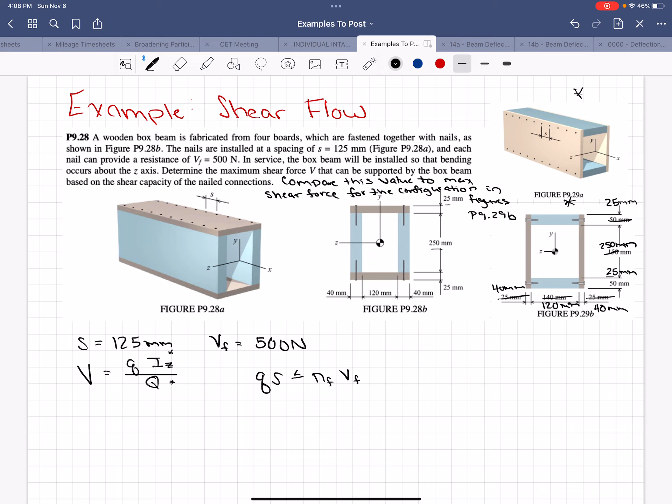So I will be the same for both, and how I'm going to do this is I'm going to find I of this whole outside box, and then I'm going to subtract I of this inside box. Okay, so that's our plan. So we have I equals the base of the outside box, 200 millimeters, times the height of the outside box, 300 millimeters, cubed, all over 12.

Now I'm going to subtract the inside box. The base of that is 120 millimeters. The height of that is 250 millimeters. That's cubed all over 12. And we get I equals 293,750,000 millimeters to the fourth. Because this is a rectangle, our neutral axis is in the middle at a height of 150 millimeters from the bottom.

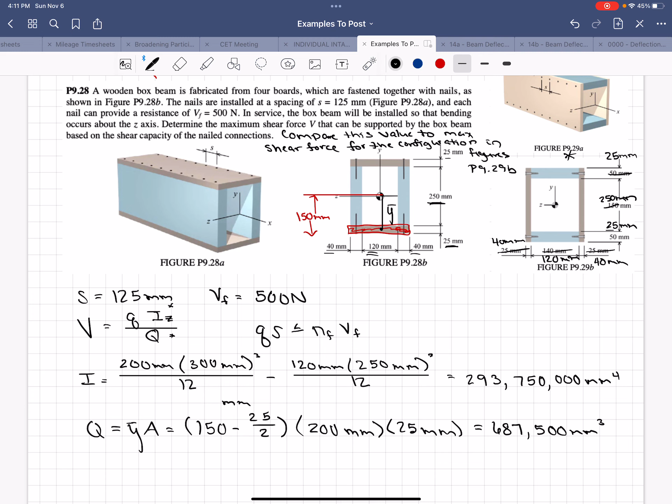Times the base of this is a full 200. We have the 40, the 120, and the 40 again. So times 200 millimeters, and the height is 25 millimeters. And we get Q equals 687,500 millimeters cubed. All right, now we are going to calculate the shear flow.

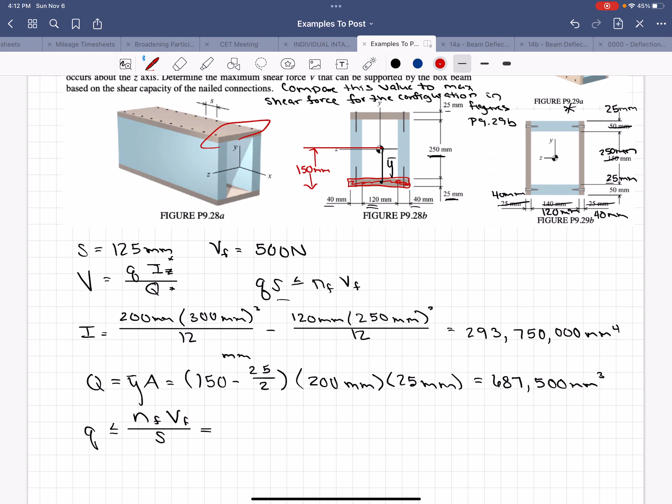So q from this equation is less than or equal to the number of fasteners times the shear force that the fastener can carry all over the spacing of the fasteners. So in this situation, the number of fasteners is 2. We're going to look at just one section of fasteners. We have one fastener here and one fastener here. So 2 nails times 500 newtons per nail, the capacity of those nails, all over a spacing of 125 millimeters. So q equals 8 newtons per millimeter.

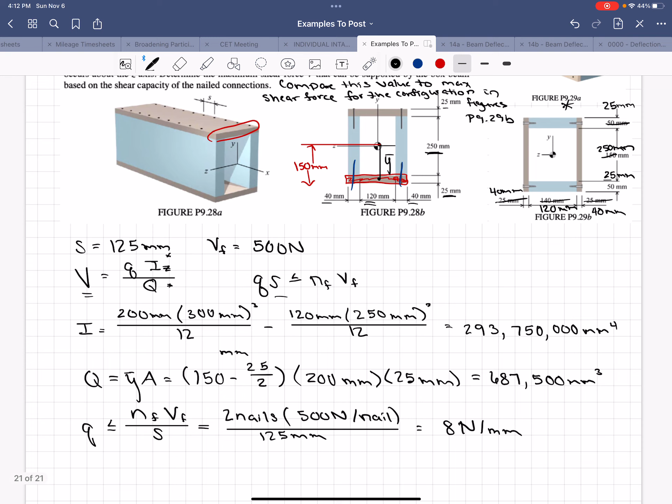All right, so then moving on to calculate the shear force of this whole beam, V.

There's Ada barking, sorry about that.

We have V equals shear flow times the moment of inertia all over Q. That equals 8 newtons per millimeter times 293,750,000 millimeters to the fourth, all over 687,500 millimeters cubed. And that equals V, shear force in the beam that's allowed, 3,418 newtons, or 3.42 kilonewtons.

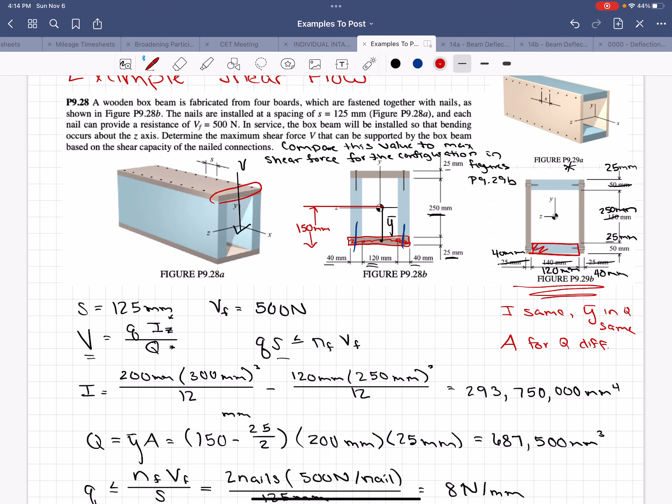All right, so now we are going to compare that to this configuration. In this configuration, I is the same. All the givens are the same. Y bar in Q is the same, but the area for Q is different. So now we're going to be looking at this area. So we need a new first moment of the area, but our shear flow is the same. So the only thing that will change is our big Q and our shear force allowable.

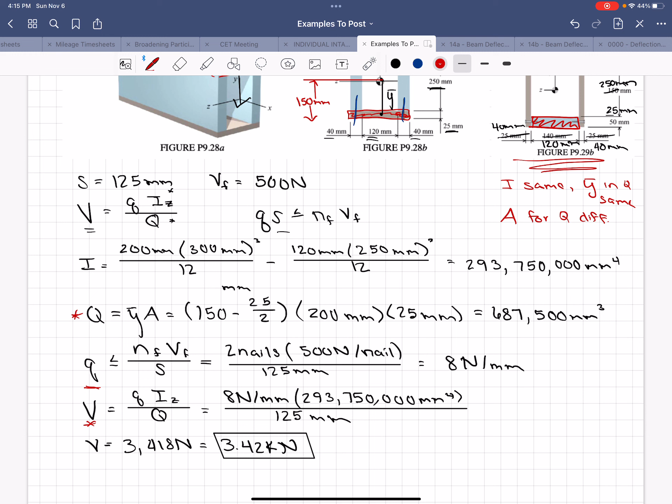So our new big Q, Q2, equals, the y bar stays the same, 150 minus 25 over 2. The area changes in only one dimension. The width is now this 120 millimeters. The height of that area stays the same at 25 millimeters, and we get a Q2 of 412,500 millimeters cubed.

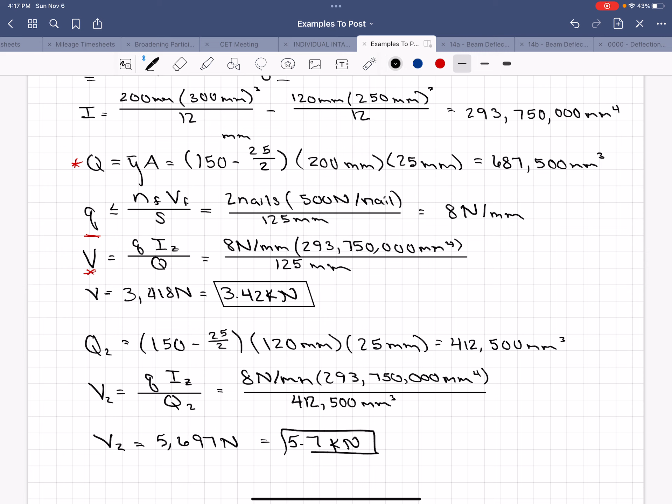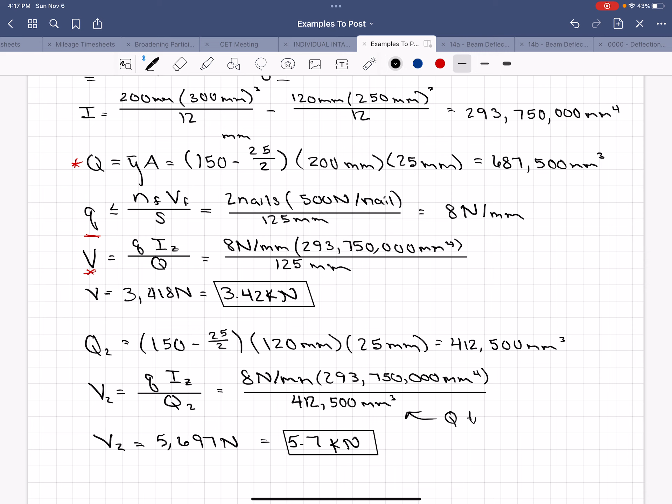Now we can plug that into the allowable shear force equation, and that's shear flow times the moment of inertia around Z all over big Q2. So this is V2. We have 8 newtons per millimeter times 293,750,000 millimeters to the fourth all over our new Q of 412,500 millimeters cubed. And now our new V is 5,697 newtons, which equals 5.7 kilonewtons. Pretty awesome. So Q goes down, V went up. All right.